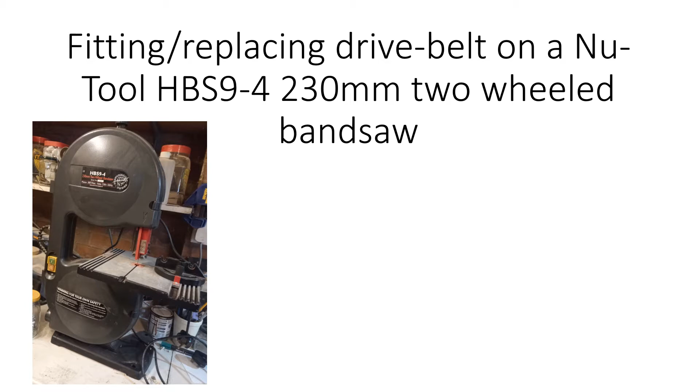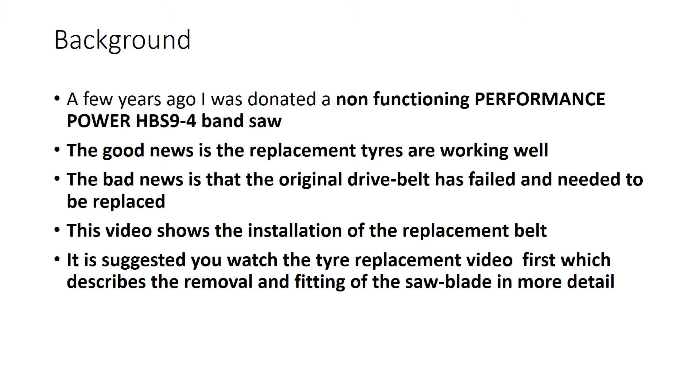The background is that I was donated a non-functioning bandsaw and replaced the tyres on it and made a video of that. The good news is the replacement tyres are still working. The bad news is that the drive belt has failed and clearly a new one needs to be fitted. This video shows the installation of this replacement belt, and it's suggested that you watch the tyre replacement video first, which describes the removal and fitting of the saw blade in more detail. Just a reminder, this is a generic design that's rebadged by a number of suppliers, and the procedure for fitting new belts will be very similar for all of them.

The first job is to remove the bandsaw blade, obviously making sure the power is disconnected. This is what is in the tyre replacement video, and some of it's repeated here for convenience.

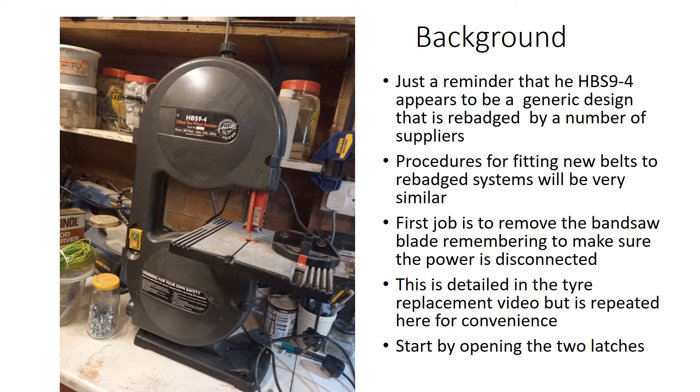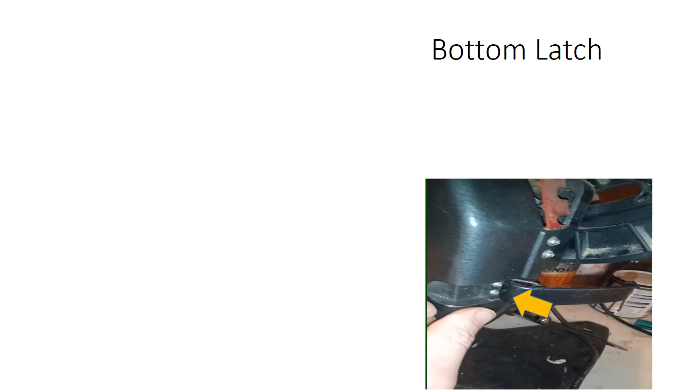First of all, you need to start by opening the two latches. This is the top latch here. This is the bottom latch. And that reveals the top wheel and the bottom wheel, and on the right hand side you can see the chewed up drive belt which needs to be replaced.

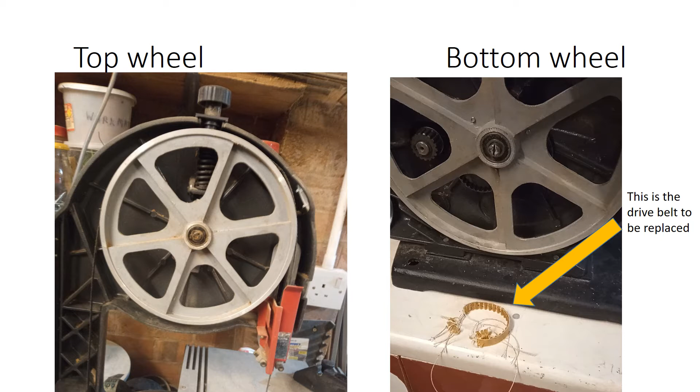The first thing that needs to be done to remove the bandsaw blade is to use the knob shown on the right hand side of this picture to move the guide halfway between the head and the table. So you can move it up and down as shown by the double-headed arrow here.

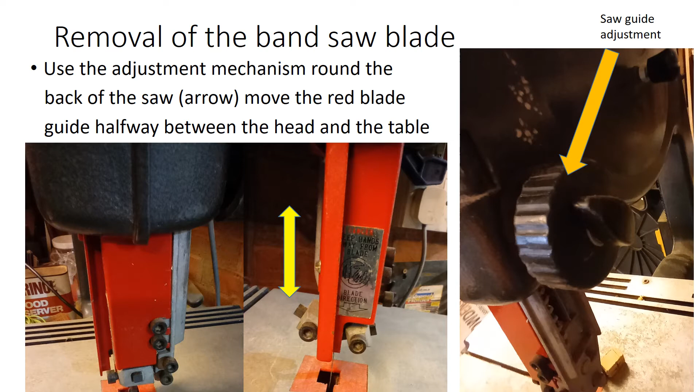The next thing is to release the tension on the blade. Use the knob at the top of the wheel, arrowed here on the left-hand side, and unthread the blade. You can see actually the drive belt connected to the main wheel before it disintegrated.

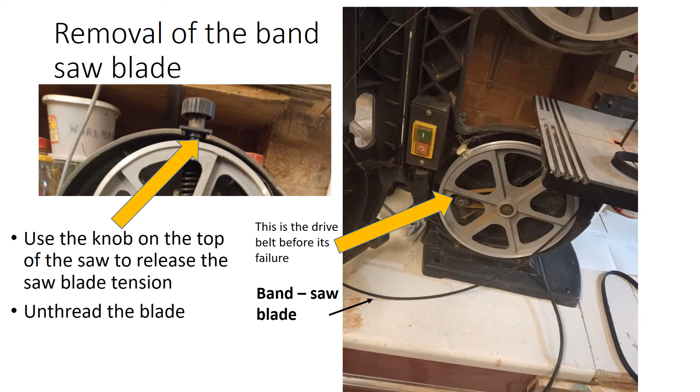The picture on the right hand side has the drive belt identified, and the next stage would be to remove this. However, in this particular case the drive belt's disintegrated, so it's not really required. However, we'd need to be able to adjust the tension when fitting the replacement drive belt, so let's just do that now.

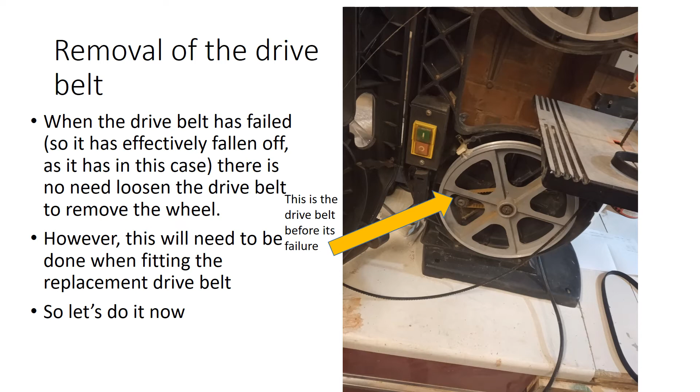The belt can be tensioned and loosened by using the two nuts that are identified by the yellow circles in the diagram on the right hand side. If you loosen these nuts, the top one is the pivot and the bottom one allows you to move the motor back and forth, tightening and loosening the belt.

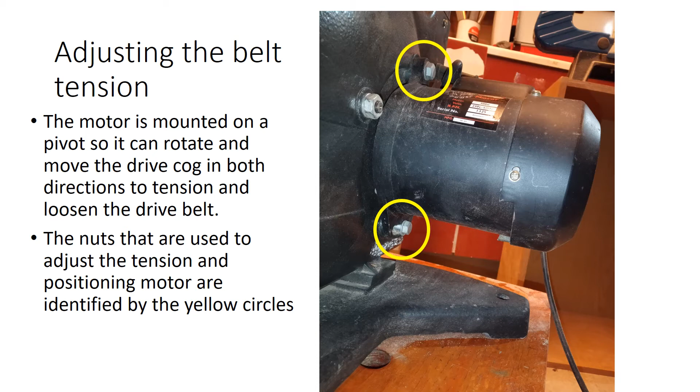It looked like the removal of the bottom pulley wheel would simply be achieved by removing the circlip that looked like it held it on. However, it proved to be jammed on solid, and so the simpler solution was simply to remove the wheel from the axle by undoing the nut that's circled in the picture on the right hand side. This holds the axle in place and enables the wheel just to be pulled out on its axle.

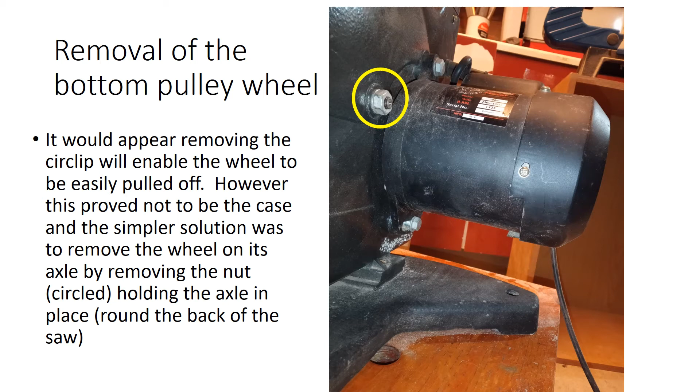So here's the pulley wheel having been removed. You can see where the pulley axle would go. The belt drive cog is identified as well.

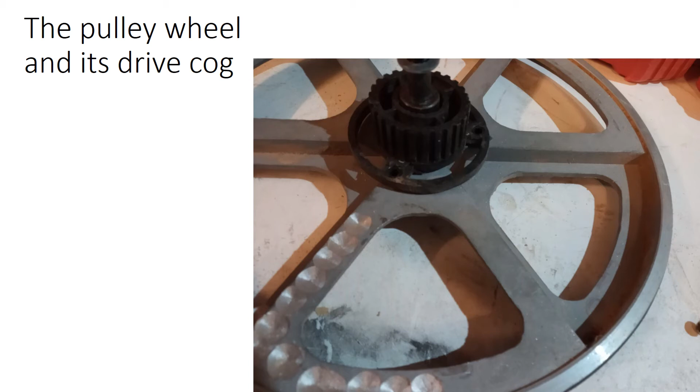There's the drive cog on the pulley wheel that's held on by screws. Here you can see the cog having been removed from the pulley wheel, and the nut that holds the axle in place is identified by the yellow circle.

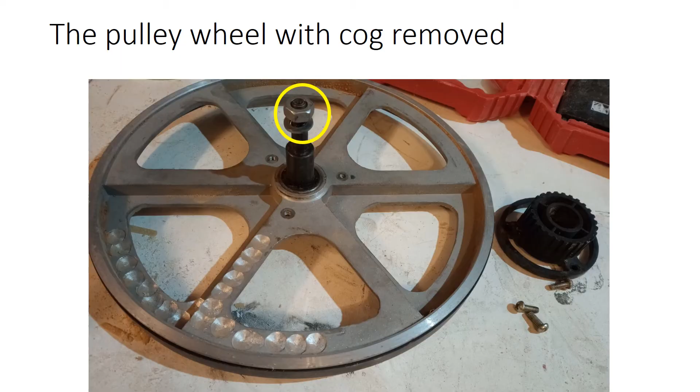Obviously the cog needs to be put back on when reassembled. So when you reassemble the system, you want to place the drive belt around this plastic cog on the bottom pulley and loosely bolt the axle in place. Then maneuver the drive belt over the drive cog, which should be relatively simple because we've already loosened the motor tensioner. Once the belt's centered on the cogs, you can tighten up the axle nut, tension up the belt, making sure the belt's still centered.

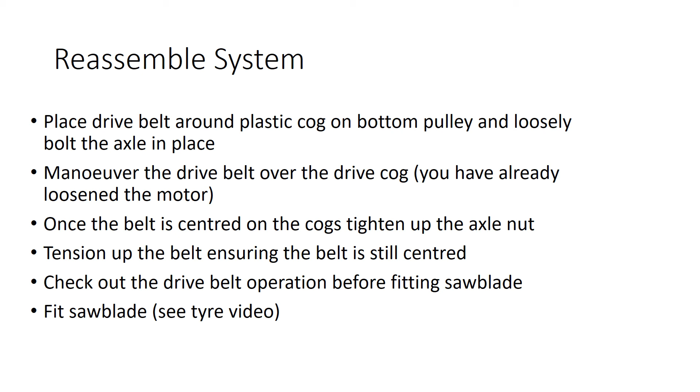Then you can check out the drive belt operation before fitting the saw blade, and the tyre video presented previously shows you how to fit the saw blade. So the next stage is to test the saw.

So in summary, you see the drive belt is relatively easy to fit, and how long it lasts is obviously yet to be determined. Certainly hope this video has been helpful. It's one way of doing the job, not necessarily the best one.